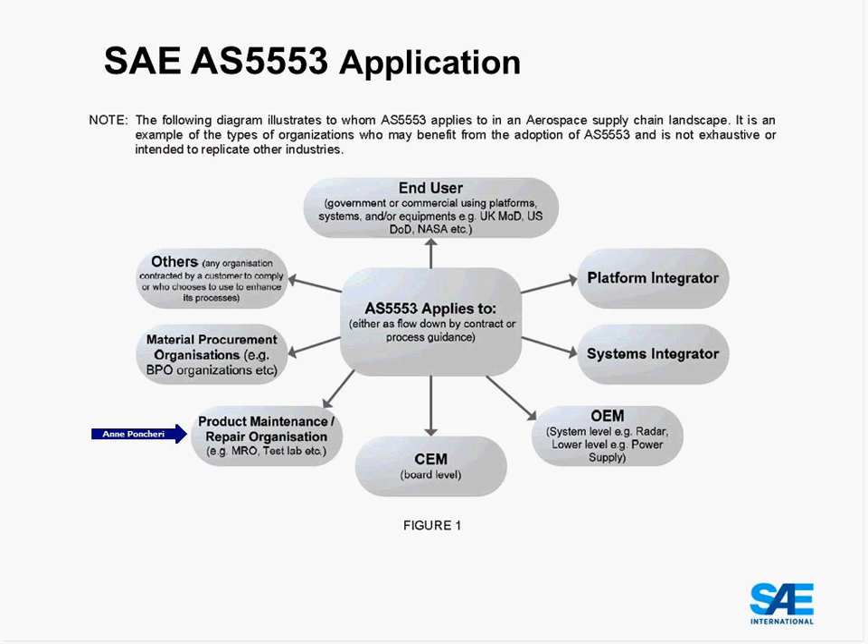Listed the table of contents. I'm going to cover just a few of the requirements of each of these standards. It wouldn't be possible for me to cover the entire document, obviously, because if you saw earlier, the courses that are offered are 2 courses that would cover just AS 5553. So I'm just going to barely scratch the surface on some of the requirements. And I selected a few that I think are fairly important that are some of the key pieces to this.

First, the most important aspect of 5553 is the development of a control plan to ensure you do not get counterfeit parts in your supply chain. And it includes that you must develop a control plan with all of these different items in place. And I'll cover these in the slides.

So first, the requirement here is that the organization shall develop, and this is verbatim from the standard, shall then implement a fraudulent counterfeit EEE parts control plan that documents its processes used for risk mitigation, disposition, and reporting of suspect or confirmed fraudulent counterfeit EEE parts. The control plan shall include the processes described in 4.1.1 through 4.1.10.

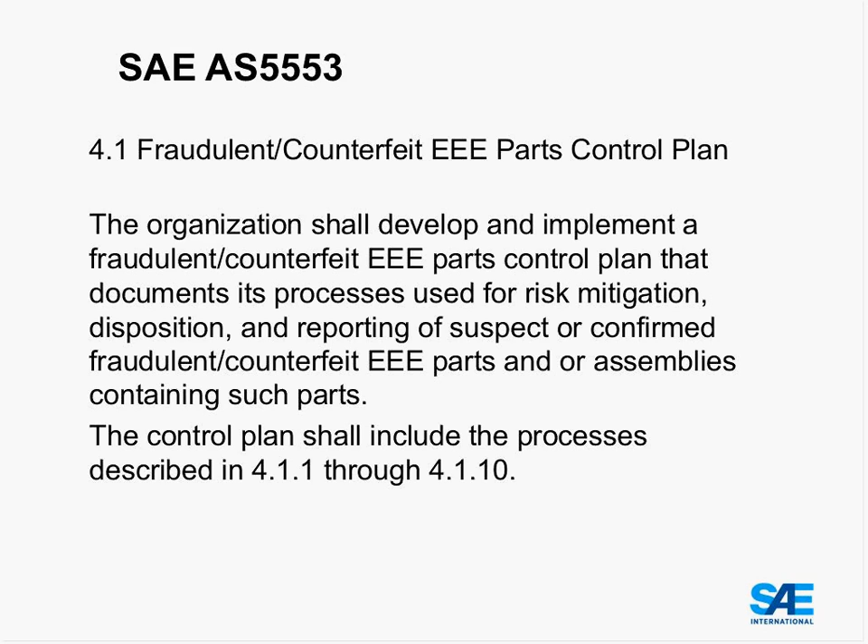So we'll talk a little bit about control plan, because some of the people who are manufacturing are familiar with this term. And some of you who are not in manufacturing may not have heard it, but a control plan basically is a written summary description of the steps needed to ensure that counterfeit parts do not enter the supply chain. It's going to describe the personnel, the actions required to make sure that you don't get counterfeit parts.

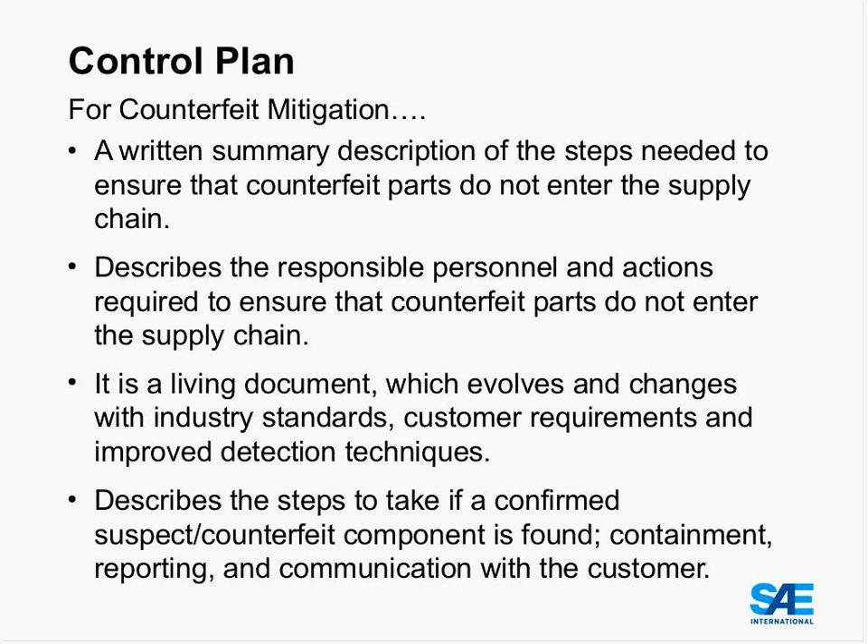One of the key things about a control plan is it's a living document. It should change and evolve because your customer requirements will change, the industry standards will change, and the counterfeiters are getting better, and the detection methods are getting better. So with all of that in mind, it should be something that's regularly reviewed and updated. Describe the steps that you'll take if you find a counterfeit part, especially containment, reporting and how you communicate with your customer.

Given the fact that you have to develop a control plan that covers everything, as I said, from 4.1.1 to 4.1.10, I want to look at the list of what all is included. You're going to have to develop a personnel training plan. You have to have policies about availability of parts and your preference to use the approved authorized supply chains, I should call them. You have to define your purchasing process. And I can't go through all of these, but you've obviously got material control and have to have consistent reporting.

So just a quick list of some of the requirements. I've already talked about personnel training. The purchasing process, you must specify a preference for purchasing directly from the OCM, the original component manufacturer, or the authorized suppliers. Traceability, you want to have the name and location of all of the supply chain intermediaries. So anyone who had it at what point in time. Disclose in writing at the time of each quote whether or not the source of supply is authorized.

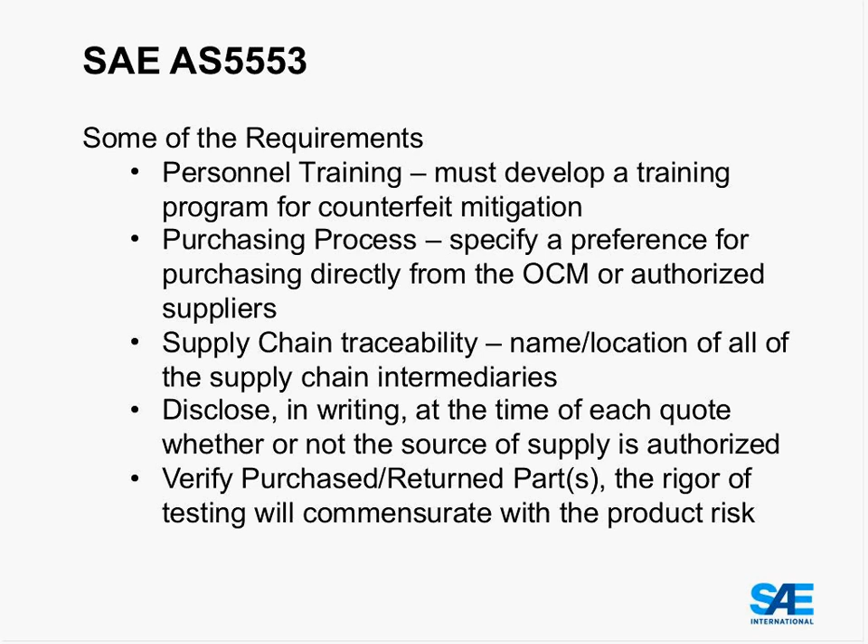And the verify purchased parts, which is basically your incoming inspection, you have to have some kind of process in place that says this is how much testing I will do depending upon the product risk.

Now, one thing that's interesting about AS 5553 is it's an over 40-page document, and only 3 of those pages are the actual requirements, and I think about 25 of them are in the appendices. And it'd be remiss if I didn't talk about the appendices, even though there are no requirements in them. If you're familiar with these types of standards, they tell you what the requirements are, but they don't tell you how to do them, but the appendices have a lot of really good best practices on how to do it.

So a good example is the procurement Appendix D, which has procurement contract examples. In the appendix, it has a lot of the verbiage that you could put directly into your purchase order to state, this is what I'm going to do if I have a counterfeit part. Because one of the things that's a big concern is we want to get these confirmed counterfeit parts out of the supply chain, and you don't want to return them back to where you got them from, because there's a good chance they're just going to turn around and sell it to somebody else.

So what language do you want to put into your order to ensure that you've protected yourself to say, I don't want to pay for these, and I also don't want to return them. So, you have to have some discussion about what you're going to do with the parts.

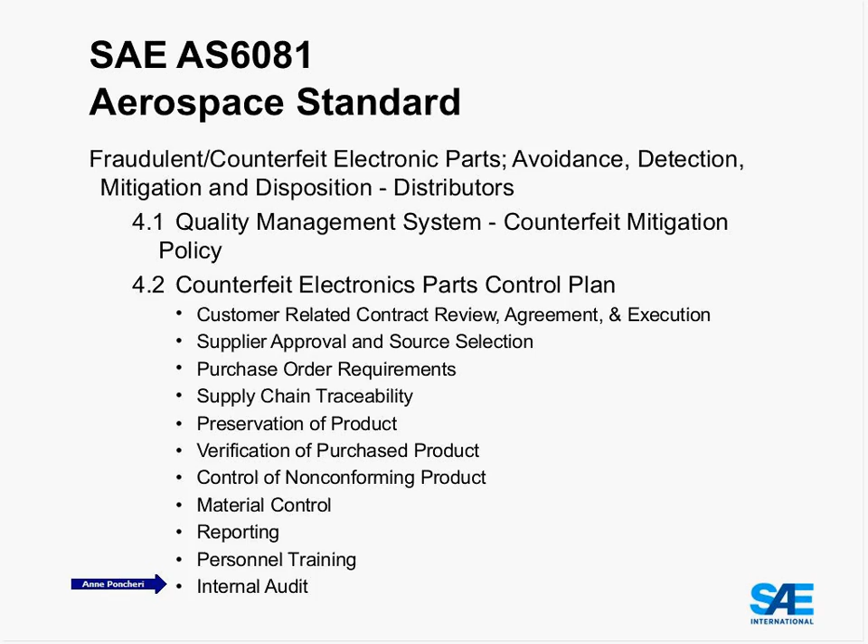Let's get a little bit more detail on that. Again, I can't cover all of the requirements, but I'm just going to cover a few. The first is that you must have a quality management system acceptable to the customer. This is a good time for me to point out that AS6081 and AS5553 are not quality management systems. So they're not going to cover all the key pieces of your quality management system. They're intended to be used to support a quality management system and only really deal with the counterfeit mitigation program.

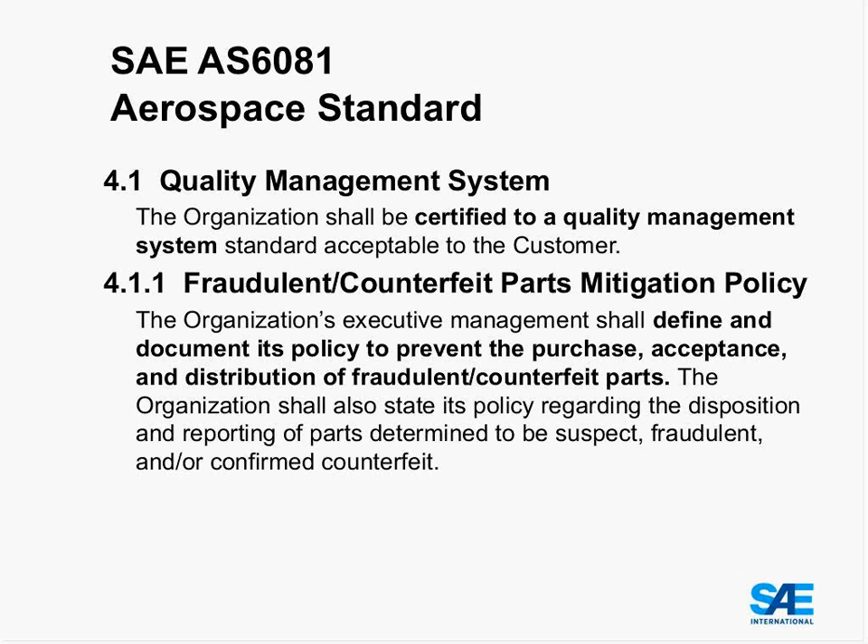So the requirement of 6081 is that you must be certified to a quality management system, which would be AS9120 or ISO 9001, whichever one your customer is requesting that you be certified to. 4.1.1 states that you have to have a counterfeit parts mitigation policy, so you have to define and document your policy to prevent the purchase, acceptance, and distribution of fraudulent parts. So you've got counterfeit parts. You need that policy, and you also need to handle how you disposition and report the parts when you do find them.

For the control plan, it's very similar. You have to develop and implement a control plan that documents what processes you put in place to make sure that you don't get counterfeit parts. And your control plan has to specify flow down of the requirements to your suppliers and to their subcontractors. So in AS6081, you need to define what requirements you want to put onto the distributors that supply into you to make sure that you don't get counterfeit parts. And it may be applied to all purchases or returns of electronic parts.

This statement is acknowledging that sometimes the counterfeit parts come in through the return process, that we tend to not have as robust of a process when we're taking in a return as we do if we're making a purchase. Sometimes we just assume that what they say is in the box and it goes on the shelf. So you have to also do inspection whenever the parts are returned.

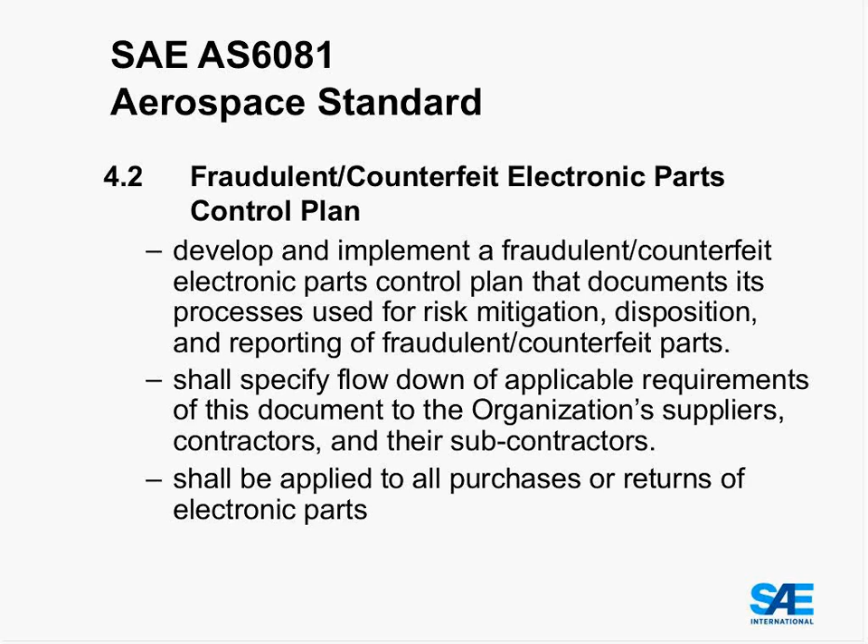So going back to Section 4.2, which has the control plan, you must have a control plan that covers all these different aspects. Although they're in a different order, for the most part it's basically the same content. You have something around your review process. You have to have a supplier approval process in place. What you put on your purchase order; there are requirements that must be on the purchase order. How you handle your product once it gets in the building, material control of the parts, and the control of non-conforming parts as well. The only difference, the one that's not in 5553, is the requirement that you do an internal audit of your parts control plan.

I'm going to cover a couple of the requirements of 6081. The first one is Section 4.2.1, Customer-Related Contract Review Agreement and Execution. You have to have a policy that specifies how you review the PO and execution of contract requirements. The second bullet item here is that the organization, and in this case the organization is the distributor, shall disclose in writing at the time of each individual quotation the source of supply by company name and location, if the organization is or is not authorized for the items being quoted, and is or is not providing a full manufacturer's warranty on the quoted material.

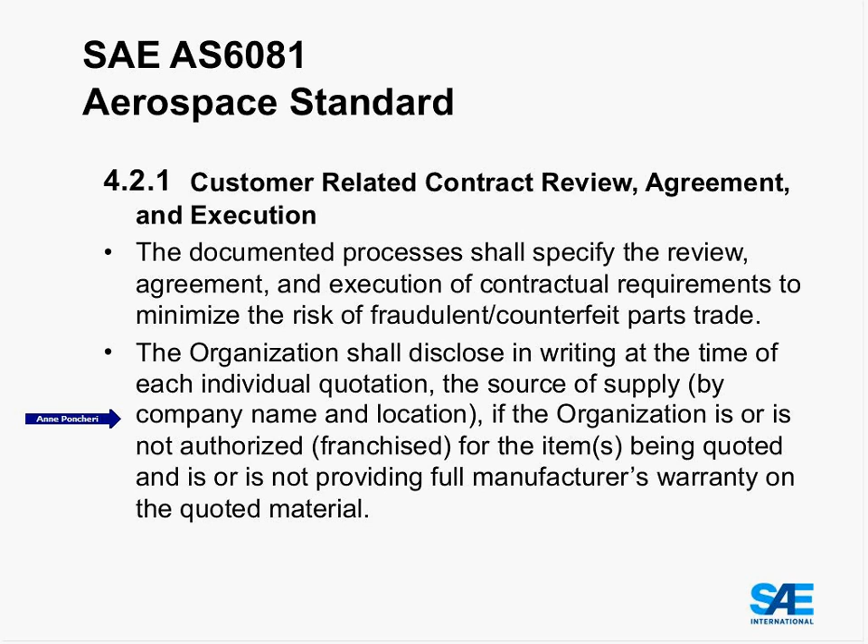So this is a requirement. At the time of quotation, you must inform your customer the name of the company and the location of where you purchased the parts. Just to give you a little bit of insight, the reason that's in there is because the company purchasing the parts from the distributor needs to be able to do a risk mitigation. And that risk mitigation is looking at the source of the parts and where it came from. So they're trying to get as much information about the components as they can when they're making a decision to purchase them.

You maintain a list of approved suppliers. Most of you, if you have any other quality management system in place, already have this. However, you also have to add a policy to procure only new and authentic parts directly from the OCMs or authorized suppliers when those parts are available from those sources. If the components are available through the original component manufacturer or their authorized suppliers, you must purchase from them first before going to any gray market or any other distributors.

Moving on to supply chain traceability, the requirement is that you have to retain records of the supply chain traceability, and that the record shall provide traceability to the OCM or aftermarket manufacturer that identifies the name and location of all of the supply chain intermediaries, all procurement lots, and date of all intermediate purchases from manufacturer to the direct source of the product for the seller.

So this one is going to be a challenging one initially because it's somewhat of the chicken and the egg. People aren't used to providing this information. You're purchasing parts, and therefore it's not available.

There's a lot of components out there, and the supply chain traceability is that if the equipment manufacturer manufactured it on such and such a date, and then it moved to their franchise on a date, then it's sold to distributor A on another date, and then distributor B on another date, and then C ends up in your warehouse. You need to have the dates and times of when all of those transactions occurred.

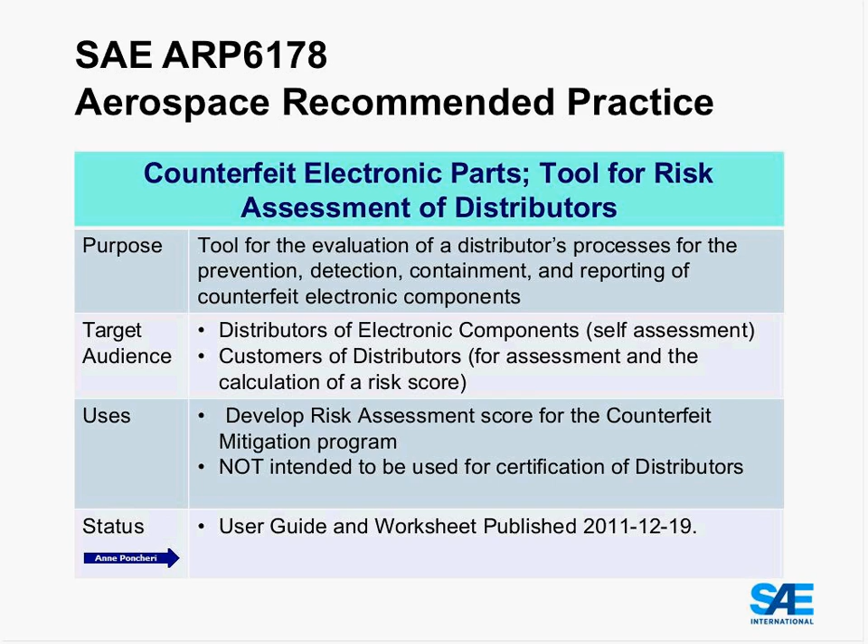The status is this document was published in 2011, and it's got a worksheet, so it is an Excel spreadsheet. When you complete the rating survey, it'll tabulate a score. So this is the outline for the document. It includes a section on justifying your assessment, the visit assessment that you're actually doing, and eventually when you're done performing the survey, it gives you a tabulated score.

One thing that's nice about this document is it's flexible in that it has the criteria listed there in the Excel spreadsheet, and you can weight the criteria. So things that you think are most important, you can put a higher weighting on, and that will change what your score would be. But it's an excellent tool to assess your distributors. I'm not going to cover this. This is just a list of the sections of the survey.

So it covers everything from what kind of quality systems they have in place, what industry memberships they are involved in, what kind of training program they have, do they have ESD and MSL capabilities. And eventually it also covers additional test and inspection, whether or not they're doing it in-house, what portion is done in-house, and if they're using a third party, who that is, and information about that test lab as well.

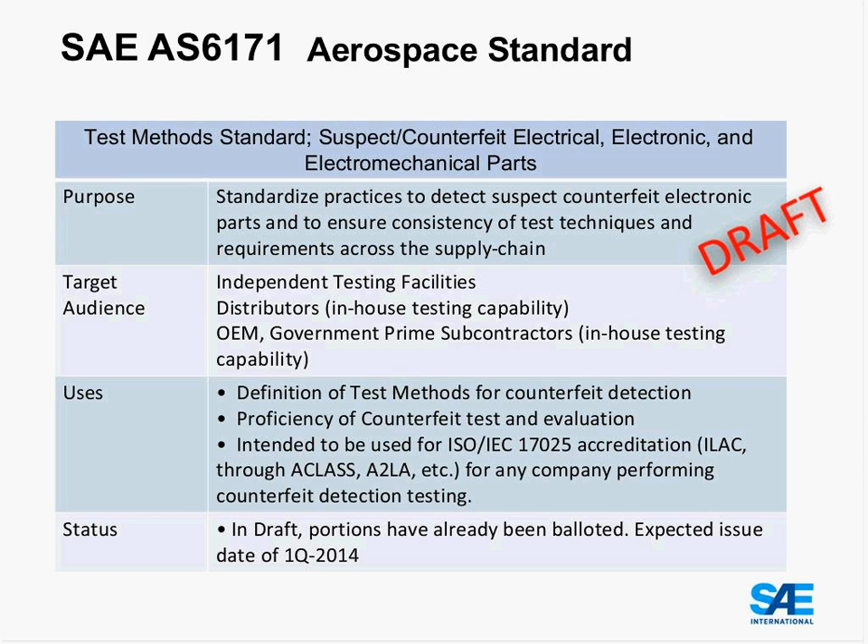Now, for those of you that aren't familiar, ISO IEC 17025 is a quality management system requirements document for laboratories. So it's kind of like, ISO 9001 is for manufacturing and AS9100 is for aerospace. This one, ISO IEC 17025, is for testing laboratories or calibration laboratories. The status of this is that it's in draft, some portions have already been balloted, and the expected issue is first quarter of 2014.

This is the outline of it. One thing I want to highlight is this is a risk-based standard. You're supposed to be performing the testing based on the risks of the part. So those first couple sections on the testing requirements and the minimum risk test level, I'm going to get into a little bit more detail on that, but really the first step is you must assess the risk of the part. It includes a counterfeit detection flow. Based on that risk, it's going to say these are the tests that need to be performed. It will also include the sampling plan, the requirements for how many units need to be tested.

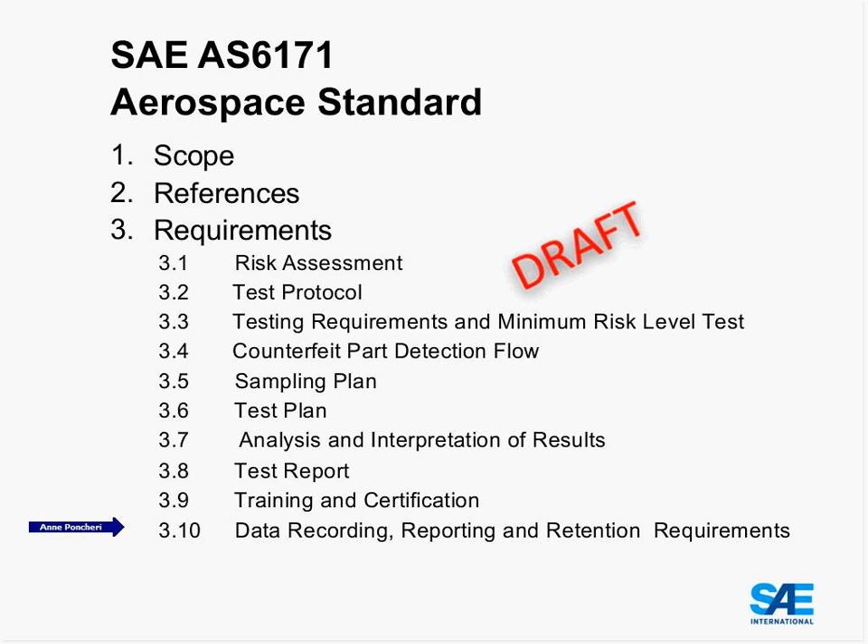There's a section on analysis and interpretation of results, a section on the test report, trying to get a little more consistency from lab to lab on what the test reports look like, requirements around training and certification of the individuals who are performing the tests, and also requirements around data recording, reporting, and retention.

Now, I talked a little bit in the beginning of the program about the number of people that are involved in this G19 committee. The G19A committee is by far the largest in terms of the number of people. There's a subcommittee for each one of these test methods, including a miscellaneous test method group. That group is covering, at this point, 3 or 4 different methods.

So in any given week, if you see the meetings and when they're occurring and the number of people that are participating, this is a pretty broad, large effort with a lot of groups and a lot of people involved in it. I'll highlight there is one committee too that's looking not at one of the test methods, but at the risk criteria and developing that model, which I'm going to talk about in a minute.

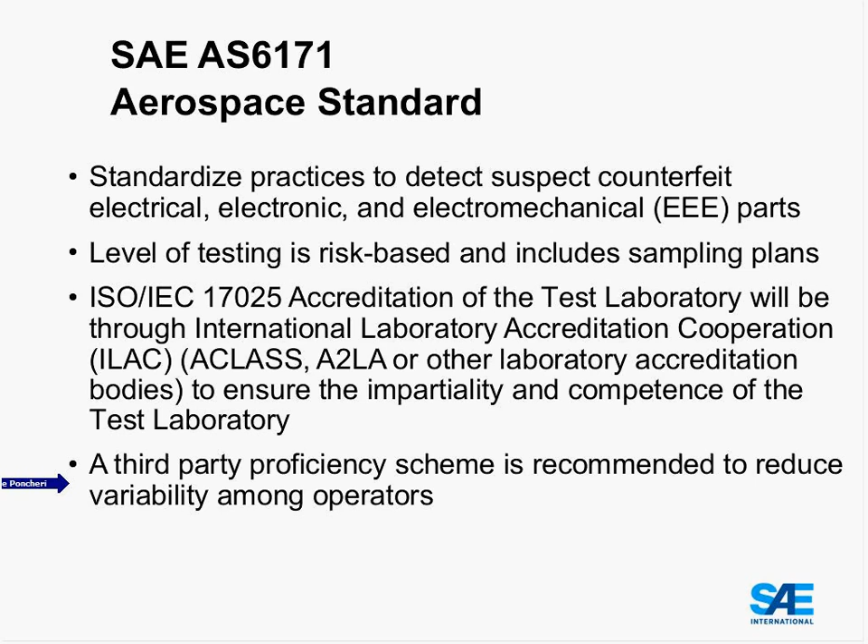And right now, we're working on a proficiency scheme program to support the training of labs to make sure that the labs are all consistent in the way they do the testing. That hasn't been fully developed, but it's being worked on, and hopefully it'll come out with this standard. There'll be some support on the proficiency testing.

So just to talk a little bit about the evaluation of this being a risk-based standard, in the section on the assessment you're looking at a couple of things. One is the risk of the part. A gentleman had asked a question about, is there anything out there that says this part is riskier than another one? So look at it in those terms. You're going to assign some kind of probability that the part is counterfeit.

Then you look at the risk of the supplier. Does this supplier have a counterfeit mitigation program in place? Is this supplier AS 6081, so that they've already done some level of testing? Is this a new supplier that you've never worked with? So that will go into your rating of the supplier.

Then you're going to look at the risk of the application. So what's the use of this component? Where is it ending up? Would a failure cause a catastrophic event? Or are there duplicate components in the system so that one component would not cause a catastrophic event? So look into all those aspects of it. Any other identified risks would all go into this recommended tier of risk.

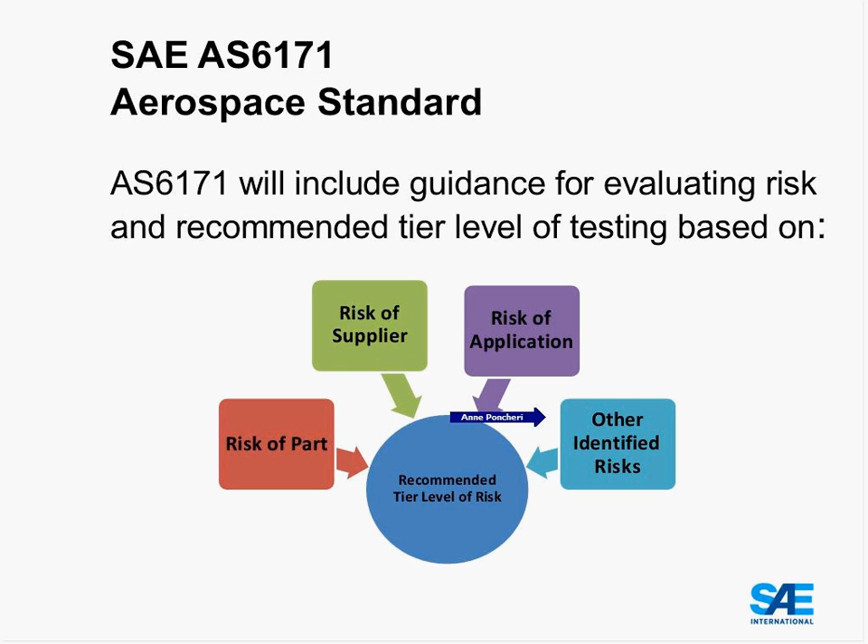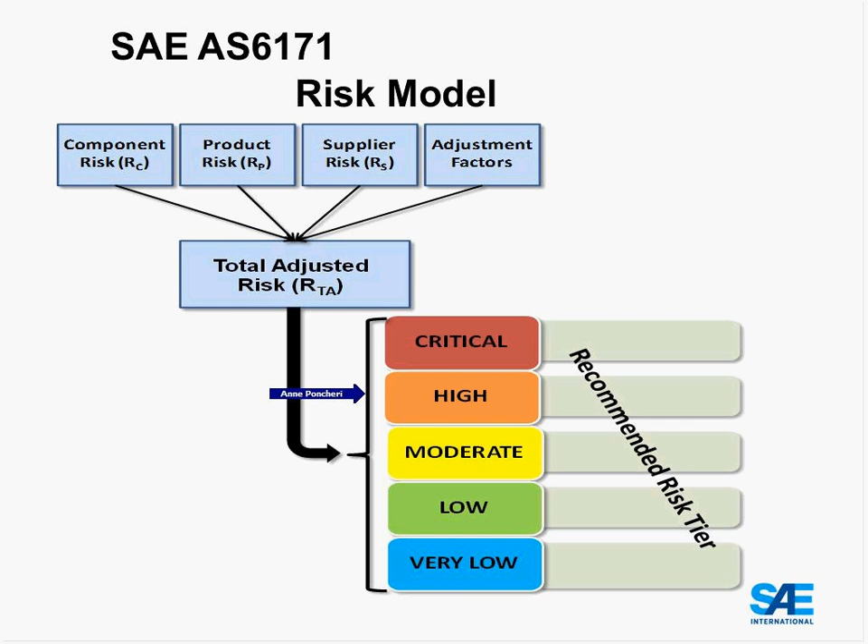So when we talk about the risk-based standard, that's because you're putting in the risk model that states this is what my risk is, and we'll say, for example, it's high. So because it's high, I have to do the following tests at the following sample sizes.

All right, so that wraps up my discussion on 6171. So now we're going to open it up to any questions.

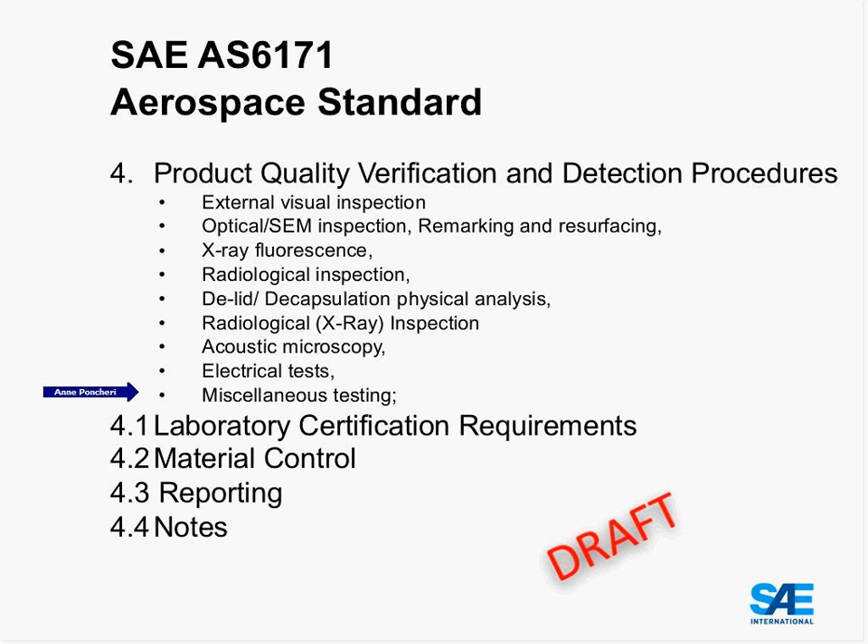I know there's some OEMs that require that the parts must go to an independent test lab for testing. There's other OEMs that prefer that the distributors do all the testing in-house. So it runs the gamut. It goes both ways. And really, to answer that question, you've got to go to your customer. But there's nothing in any of the standards that says that the distributors can't do testing in-house.